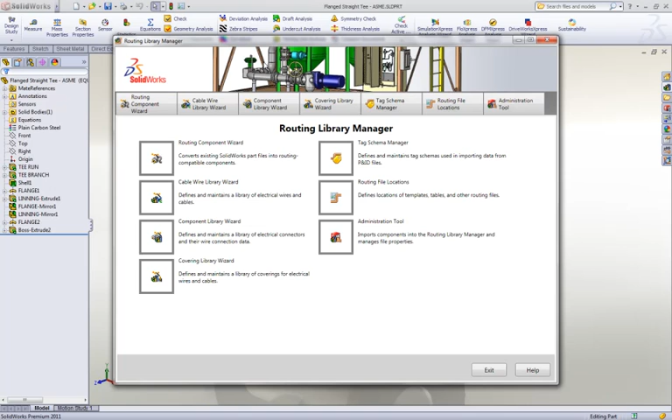In SolidWorks 2011, routing has a ton of new functionality, so here goes. All the individual libraries for electrical components, wires and cables, and for piping and tubing, and all the different add component wizards have all been consolidated into one single routing library manager. Extra component types have also been added, such as gaskets, O-lets, hangers and others.

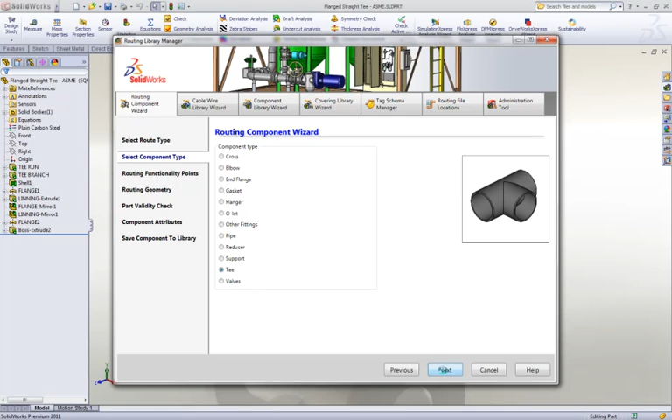The Add Component wizard has also had a user interface overhaul, making it easier to understand and faster to populate your libraries. Follow the easy instructions to add all the connection points in the correct locations in your models. These last two tabs control the import of P&ID data from external applications.

The Schema Editor enables you to take the XML output from the P&ID system and break it down into its constituent parts so that SolidWorks can understand it. Imported XML files in any format can then be categorized quickly using this straightforward interface.

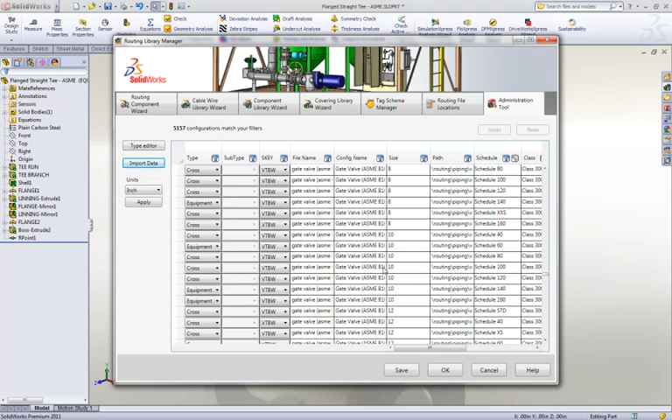The final tab gives us a view of a new piping equipment database that can be easily populated with the components in the design library or with any components you may have created yourself or downloaded. This is used when the P&ID file does not include the associated SolidWorks file for each piece of equipment. Rather than search for a suitable component, the database will immediately give you a filtered list of equipment to choose from, saving a lot of time and reducing errors.

Let's look at some changes in pipe routing. Most new pipe routes start by dragging and dropping a flange into the assembly. Now the flange has extra intelligence and can auto-size itself to the port or flange it is assembled to, so you don't need to guess each time or make measurements up front. All you need to select is the schedule.

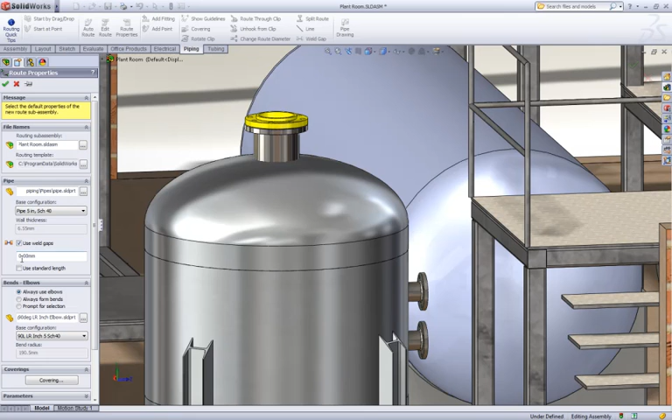When creating a route, you can now specify a default weld gap size to be applied between all the pipes and flanges. We'll see how that works in a minute. Add another flange to the route, which again auto-sizes, and finish it off with auto route to connect the flanges. Pipe routing used to be a labour-intensive activity, but with all the automation tools now available in SolidWorks, it takes no time at all.

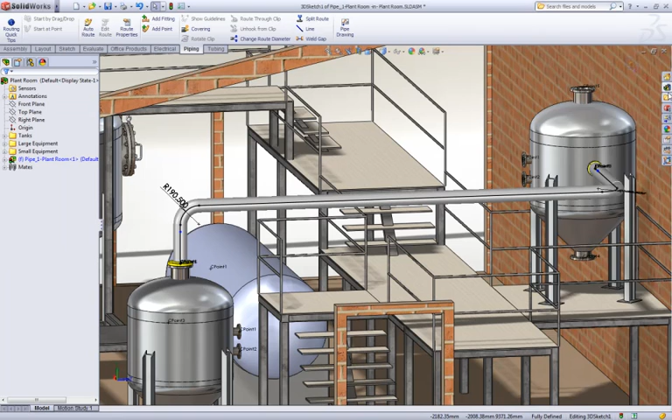Just for completeness' sake, we'll add a reducer and finish the route. SolidWorks of course checks the validity of the route and suggests any changes that need to be made. The weld gap can clearly be seen in the 3D pipe models, and the cut lists are accurate and always up to date. If you need to adjust any gaps individually, there's a button for that, and callouts for each joint.

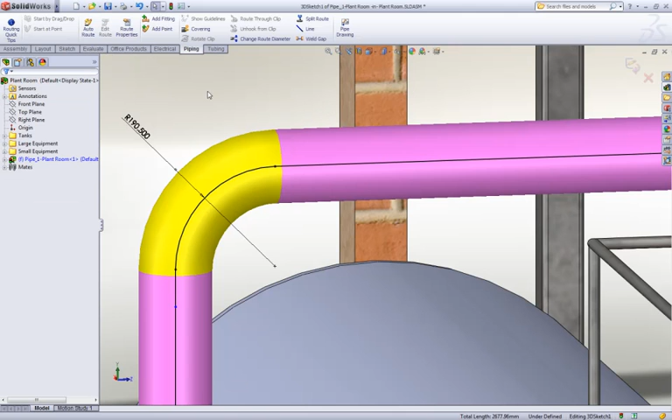Some big usability improvements have been added when routing using the P&ID import capability. After loading the XML file, you get a real-time report listing not only which pipe routes have been completed successfully, but also the port numbers and pipe tags to help you get a clear understanding of what's left to do.

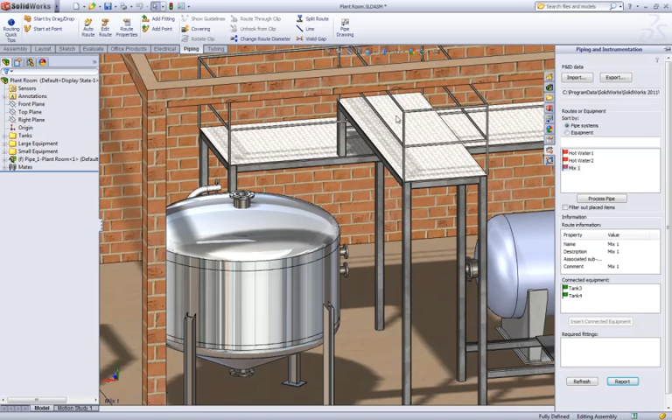Processing the Mix 1 pipe route automatically adds the correct size flanges to the correct ports and adds a guideline between the two. You no longer need to be in auto route to convert the guidelines, and a right mouse click will cycle through all the possible alternatives. It's simple and fast, and of course you have all the flexibility of a 3D sketch to make any modifications you want.

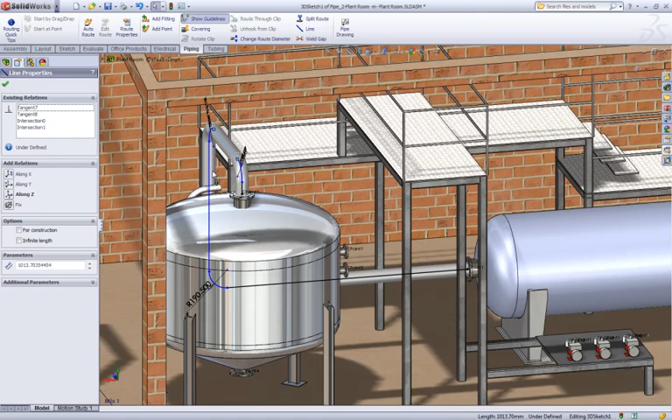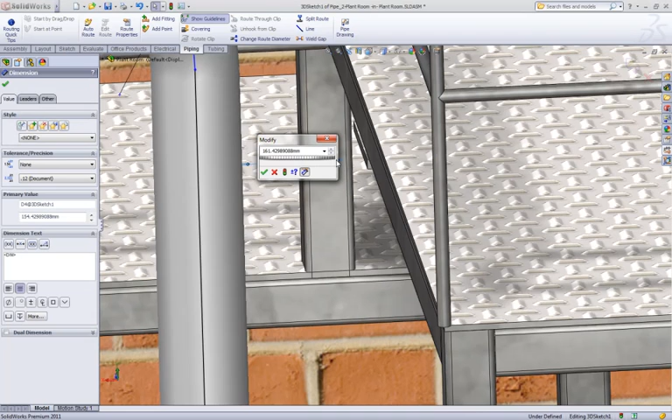If you need to have more control over the location of your pipes, you can add dimensions. Dimensions added to pipes in SolidWorks 2011 by default measure to the outer diameter of the pipe, so it doesn't matter what schedule pipe you're using or if you've added coverings, the clearance will be maintained.

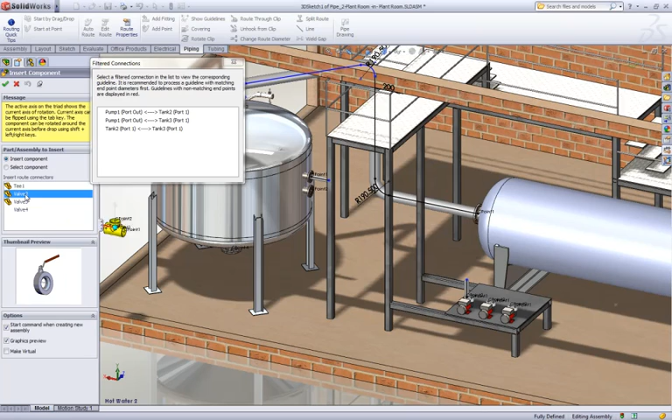Let's add the next route, which needs a number of extra fittings to be assembled. Of course, it's not possible to add these fittings until the pipeline is placed, so a new dialog called Filtered Connections shows all the individual pipe sections without the fittings. This gives a clear understanding of where the pipes need to go.

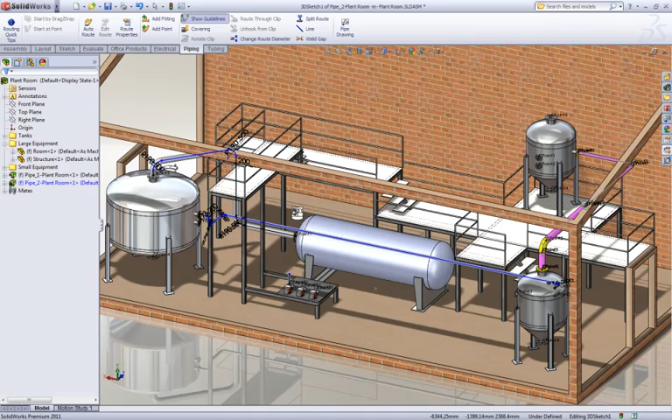We can convert the guidelines like we did before, but we can't have pipes floating in space like that, so we'll undo the auto route and give it a helping hand using the line tool to partially construct the pipes. When you're done, the guideline updates so you can use Convert Guidelines again and Autoroute to finish the job.

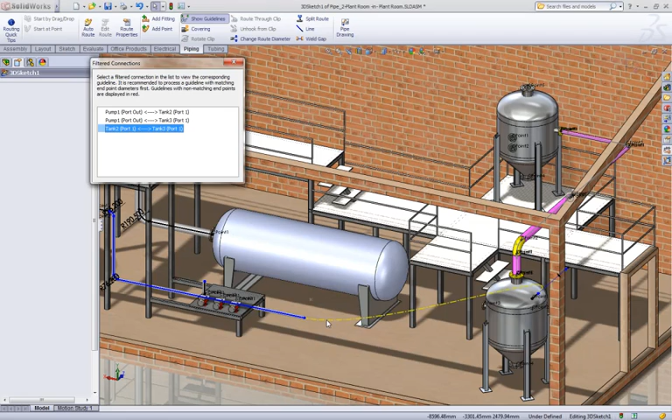Now when we process the pipe route again, the pipe segment where the currently selected fitting needs to go is highlighted in green, so there's no confusion. The new branch added to the T causes the Filtered Connections dialog to appear again, indicating that this needs one of the fittings in our list to be placed along that pipe segment.

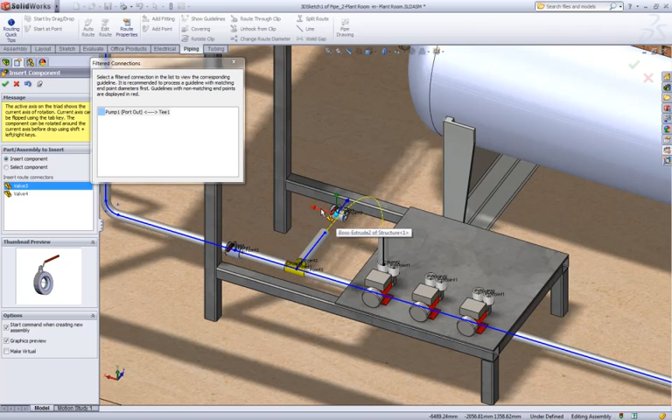This valve needs to go on this green segment, but the next valve cannot be placed, so we'll just come out of that for a moment, convert the guidelines, and go back in to finish processing the pipe. Now the last two remaining valves can be placed.

The orientation of a fitting can be set when the fitting is placed, but if you need to move them later, you can use the new Move Fitting with Triad command. This brings up the familiar triad and allows you to rotate it easily using the on-screen ruler to snap to.

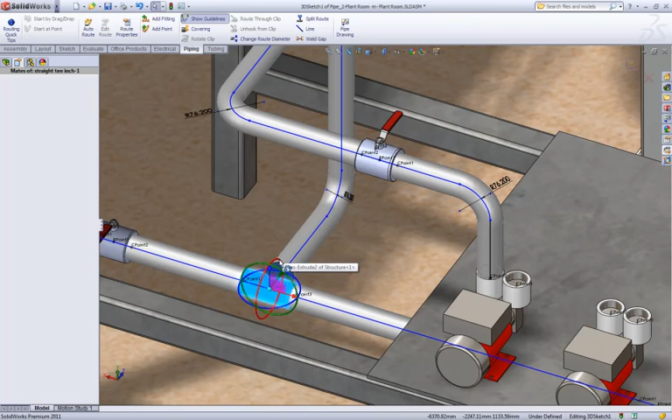If we rotate this T-piece, a new guideline is added, letting you know that we've broken the line and it needs to be reattached. We'll just delete these three segments and attach the dangling pipe to the T. Easy. But what about the valve underneath the platform? It can't be reached.

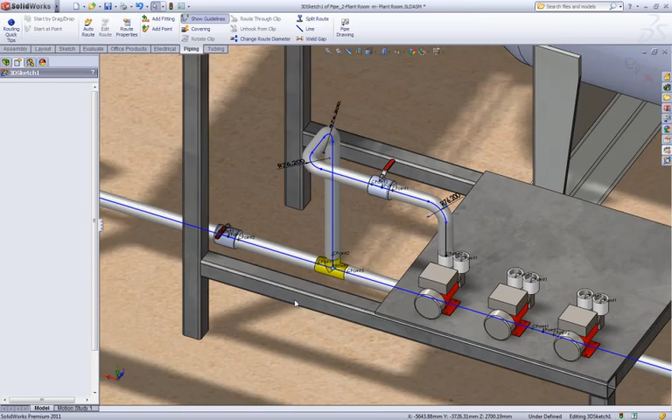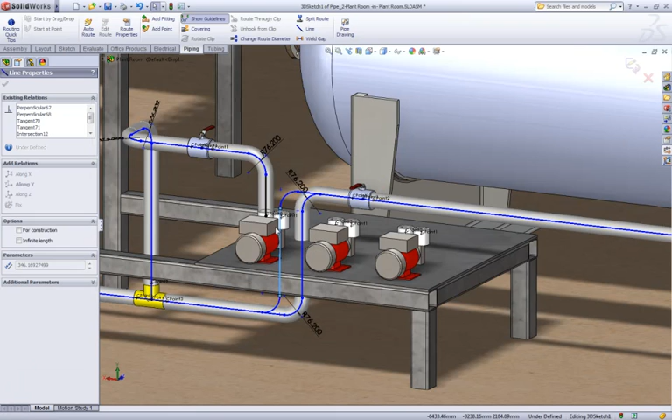Using the Move Fitting with Triad, fittings can be pulled out of the pipeline. SolidWorks lets you connect the broken pipes using all the slick tools we've just seen. This tool alone will save an enormous amount of time if extra equipment is assembled and pipes need to be rerouted around them.

SolidWorks routing is a powerful tool to help every designer in the power and process industries. And that's just the tip of the iceberg. Don't forget there's electrical routing too.